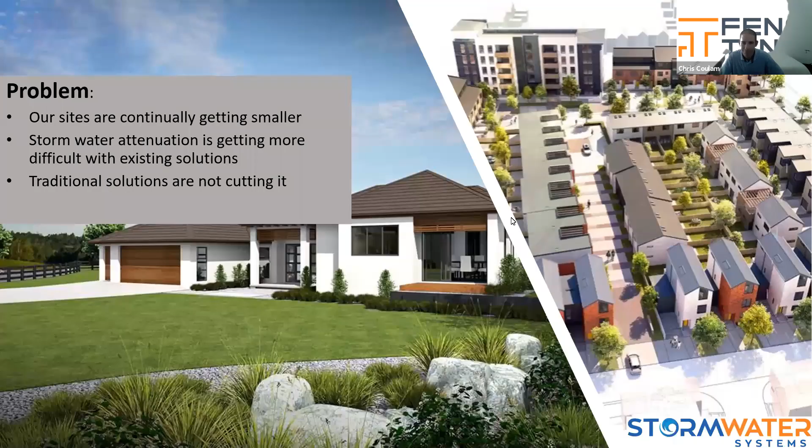So, the FenceTank. The reason that we're having to do lots of tanks is because of the increased development. So as those of you in Auckland especially will understand, we're turning green fields, which are nice and permeable, into concrete and steel and tiled roofs, which of course is not permeable. It means there's a much greater flow of rainwater off those hard surfaces. For those of you engineers out there, this is obviously nothing you don't know about.

What has happened, of course, is that we're needing to eliminate as much as we can the bad effect. So that's where stormwater engineers come in, and what we have to do is basically attenuate the flow. So we need to return the runoff to what it was pre-development. So that's where the civil engineers will calculate the stormwater requirement and what size of tank or level of storage is required.

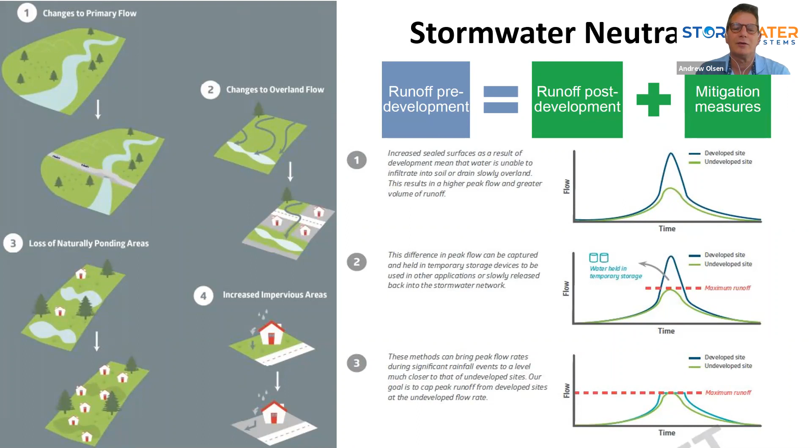We can also do that for those of you that are just looking for a quick calculation. We have access and are working with a number of civil engineering companies now to be able to provide that at competitive prices for those of you building companies out there.

So again, we can do a SMAF calculation for you if required. But in these areas, you've got the extra requirement of having both reuse as well as detention. And in Council's wisdom, they created two flow calculations, flow 1 and flow 2, quite a small difference between the two of them. But bottom line is that at least 5 millimeters of the volume that comes off the site has to be used on site.

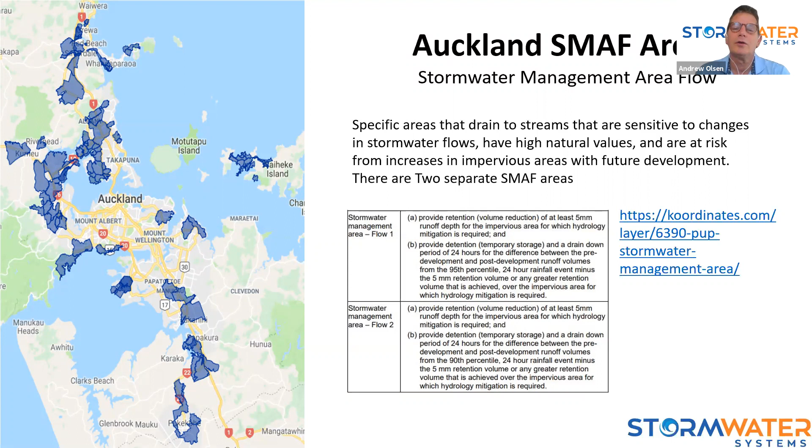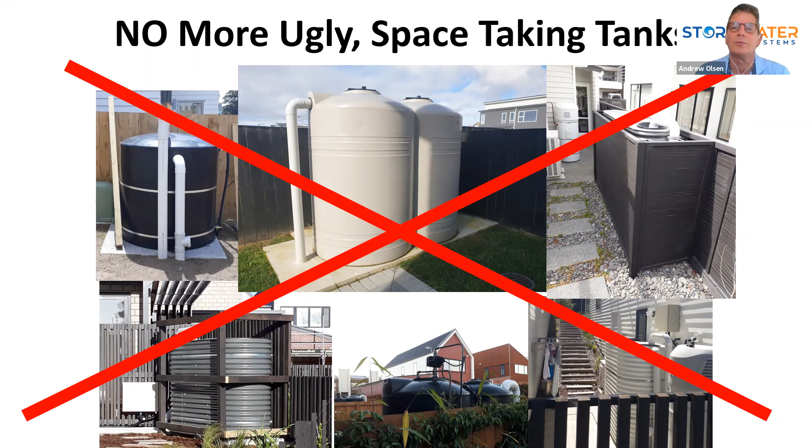So up until now, the options have been highly attractive. A lot of these were photos taken out Hobsonville and Scott Point, where, as you can see there, big lumps of concrete and all very attractive issues. And if they're not fenced, you also then have the cost of a fence as well. So with our fence tank, what you won't get is a tank that sticks above your fence and then the pipework and the like above that.

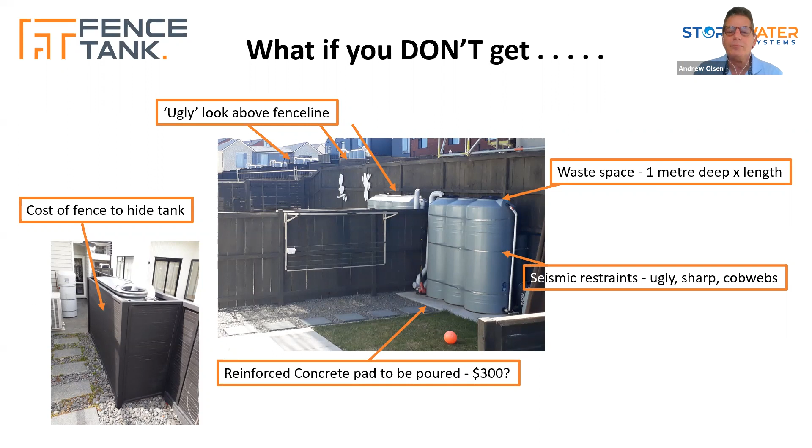You won't get the waste space, or as much waste space that takes at the back of the property. You got these seismic restraints, which have a habit of cutting little fingers and collecting cobwebs and the like. You won't have to pay for a reinforced concrete pad as well, and you won't have to then pay for the cost of a fence to hide your tank. What you will get, though, is the fence tank. Ta-da! So, introducing the fence tank. As you can see here, fairly slim profile and made in New Zealand.

Now, the tank itself, 1800 long by 1800 high, coincidentally the same height as your standard close board fence. Total depth of the tank's 410, but when it's put in line with the fence, it actually only protrudes 265-ish, depending on the thickness of your rails attached to the posts and then also the thickness of the palings. So anywhere between sort of 250 and 275 proud of the fence. What that means, of course, is that you can quite easily run it down these narrow 1 metre setbacks on the smaller sites and still have room to get past it. The other thing to note here, of course, is the 20-year warranty.

The joys of working from home is you get the doorbells with the deliveries in the background as well.

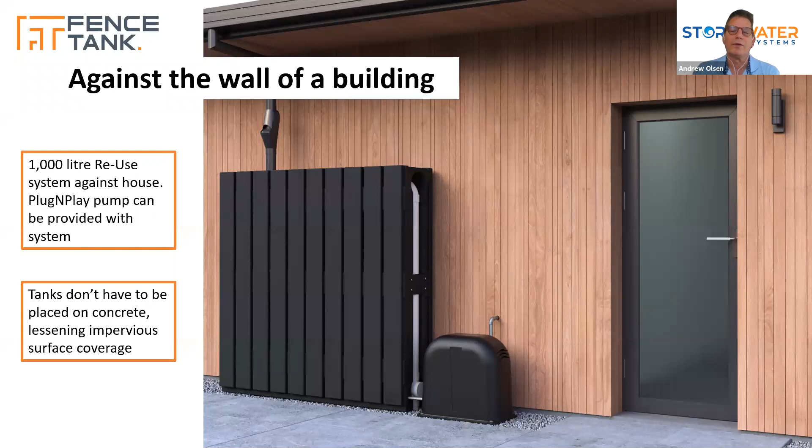The product doesn't have to just be used as a fence, though, although that was the original idea, and you'll see plenty of examples of that coming up. Just a note, these are all 3D images. None of these are photographs. The product is still in the process of being manufactured. So Dreambox have done an amazing job. A group of young guys in Wellington who are very, very talented.

So here you see a 1,000-litre tank. Obviously, each unit is 1,000 litres. And this one you see connected to one of our pumps, the plug-and-play pump, and connected up under the eaves of a house. So you'll note there the guttering or the downpipe coming straight into the top of the tank with a gutter guard. We always recommend putting a leaf diverter on every tank inlet. And this is the overflow pipe here, and the pump connected in at the bottom of the tank there. The other thing to note here is the tank doesn't have to be placed on concrete, so that also helps with lessening your impervious surface coverage.

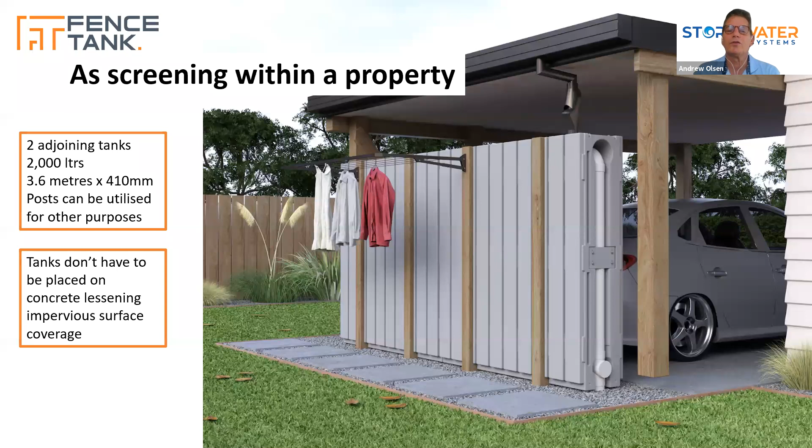Here's another example of it used on site, not actually in the fence line, but as a fence within the property. So here it is partitioning off the back of a carport, for example, and with the clothesline attached to the posts at the rear. Again, note the pervious surface that it can be placed on.

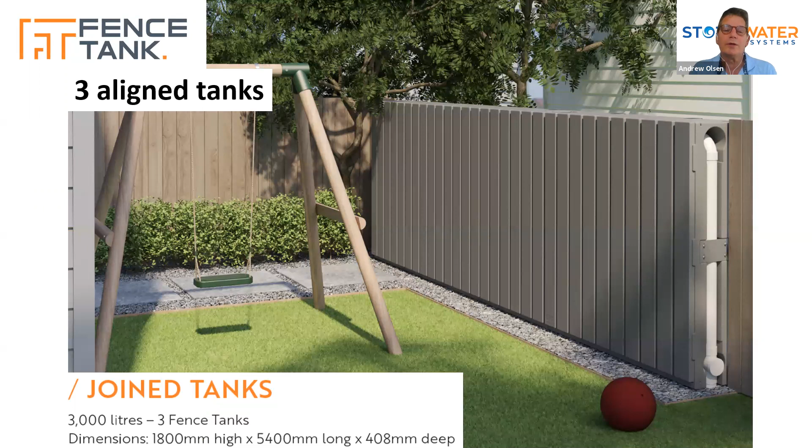Now, the real benefit here is for sites like Hobsonville Point. This is where we thought of originally. 3 in a row joined together seamlessly like this, 3,000 litres. So we don't have different sized tanks as such. We don't have a 1, a 2, a 3, a 5, whatever. You just join as many together as you need to achieve the volume that is required. So modular, scalable, flexible, yeah. So here we go, 3 in a row at the back of this property. Again, note the fact that they don't have to be on a concrete pad.

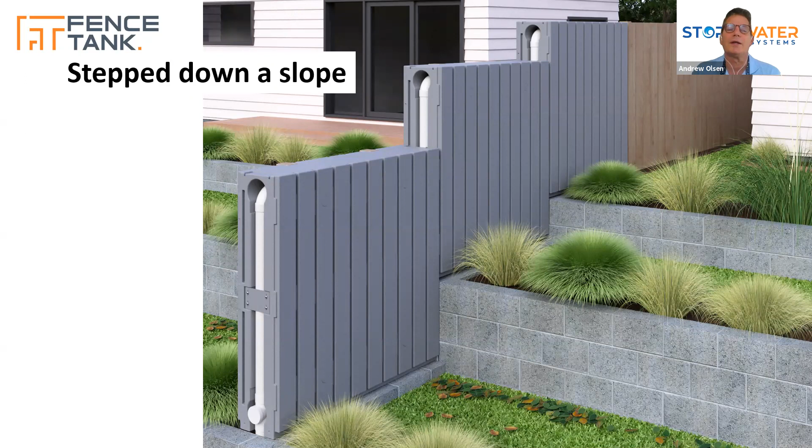And even able to be stepped down a slope on sloping land. So obviously you don't run them with the contour, because all the water ends up at one end and probably ends up in your tank sliding down the slope, but you can step them. And so as long as they're on good ground, definition of good ground, and level, you can join them together down a slope. So these ones we've shown with different levels of height difference here, and down a sloping property on top of the retaining walls.

Anyway, it's not an ad for them.

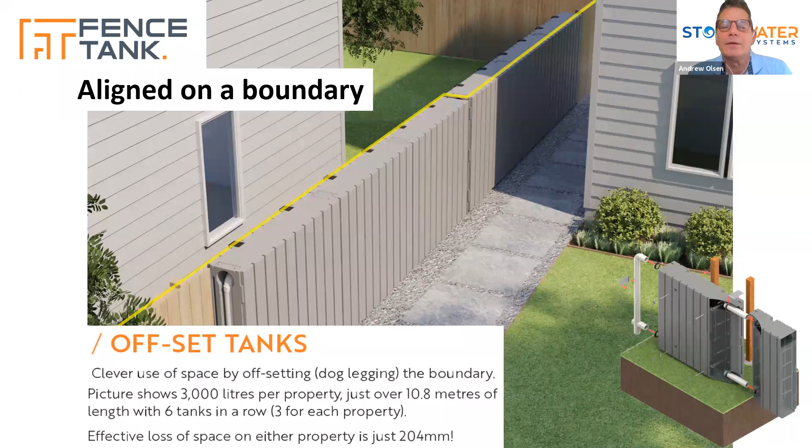Now, this is where it really gets clever and exciting. And this is what we were talking with Universal about right at the very beginning: the ability, if you're working with developers or looking at the cutting up of land, if you offset every second boundary with a dog leg, like this in the middle here, in effect you can run the tanks in a straight line and solve your easement issues by having a dog leg. That way, in effect, you only lose a couple of 100 mil on each side of usable space. So where you've got narrow sites, you've got the ability to make the most of that land space.

We did some rough calculations with the boys at Unis, and if we had worked with them from the outset, they reckoned that they may have been able to achieve up to 10 extra sites by using this methodology. Granted, I think the plan is 2,000 sites in that particular development over the course of a number of years, but 10 or 11 extra sites, that's money in your back pocket.

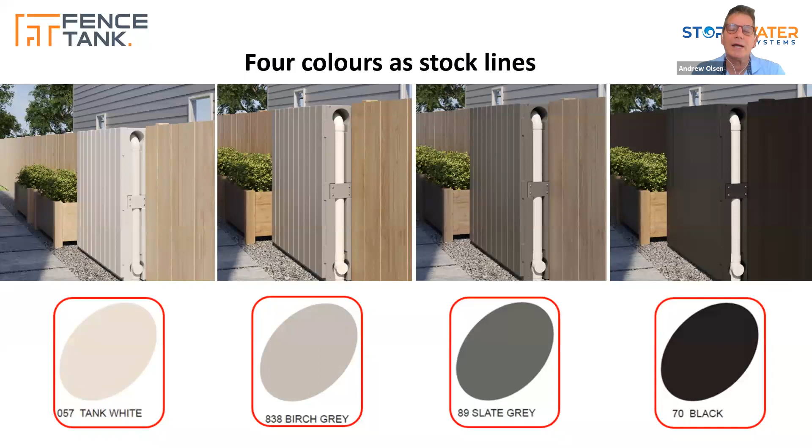Now, colouring. Talking to a number of architects to get some feedback on what the most popular colours were, we've landed with tank white, birch grey, slate grey and black. So basically white, light, dark grey and black. We do recommend you don't do a full fence of the black, especially if you're looking for potable water, because you'd be having hot water coming out on a regular basis.

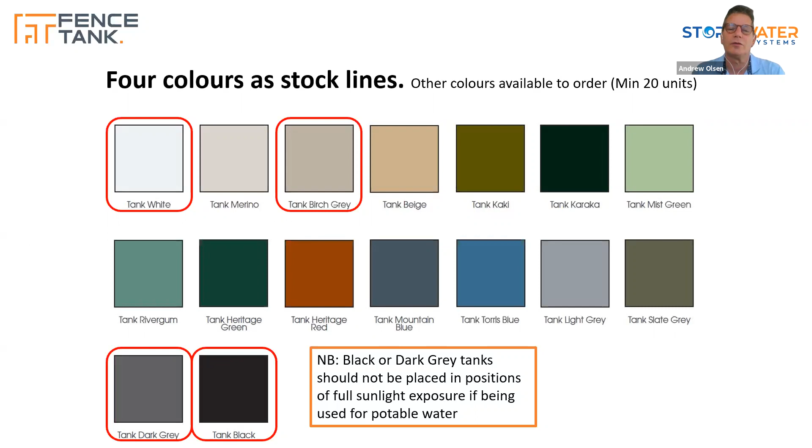But as you can see here, working with Matrix, we have quite a wide range of tank colours available. And while we're carrying these 4 in stock, we can make to order. So if you're planning from the outset as part of a development, as long as we have a minimum of 20 in the order, we can make any of these tank colours for the same price as what we'll tell you later.

And if you're wanting to get totally creative, in fact, we were talking to Jasmax about a school job, and they were looking at potentially multiple coloured tanks. So if you wanted to get carried away for a childcare centre or the like, we could do runs of different coloured tanks. These, of course, do cost more because the polymers cost more for these other colours.

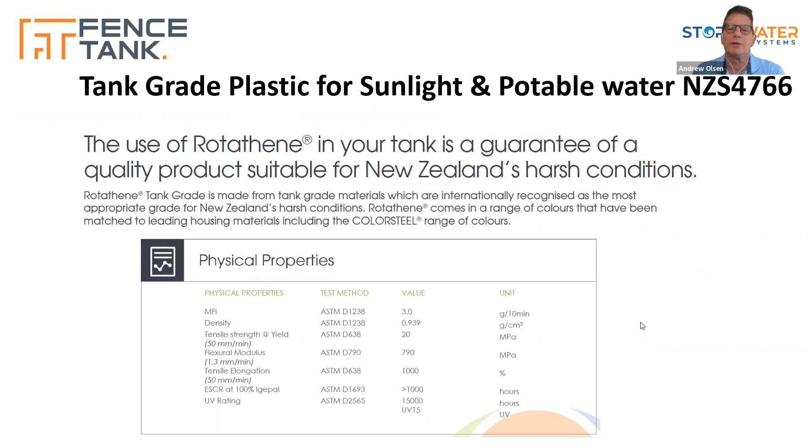Now, just to clarify, it is all tank grade plastic, the same plastic as is used by all tank manufacturers in New Zealand. There is a standard for it, NZS 4766, and within that there are all of these other methodologies and values that have to be met. So obviously we are creating a product that meets all of those standards.

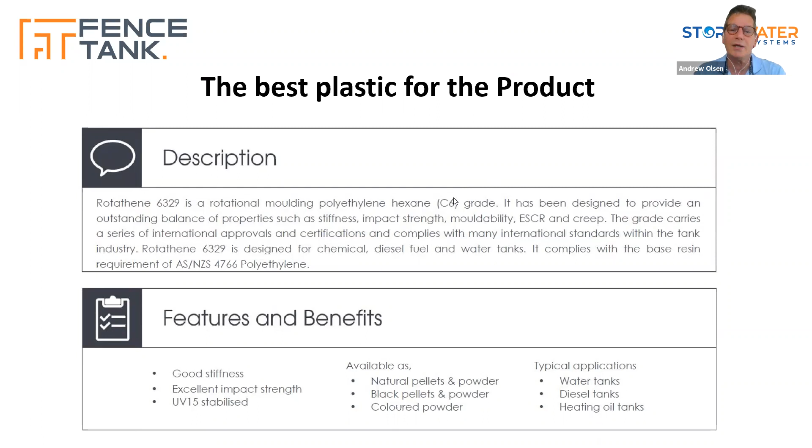Features and benefits: these products are designed with a UV rating of 15,000 hours minimum. 4766 only requires 8,000 hours, so already we're nearly twice the standard. And as you would have seen earlier, it comes with a 20-year guarantee anyway.

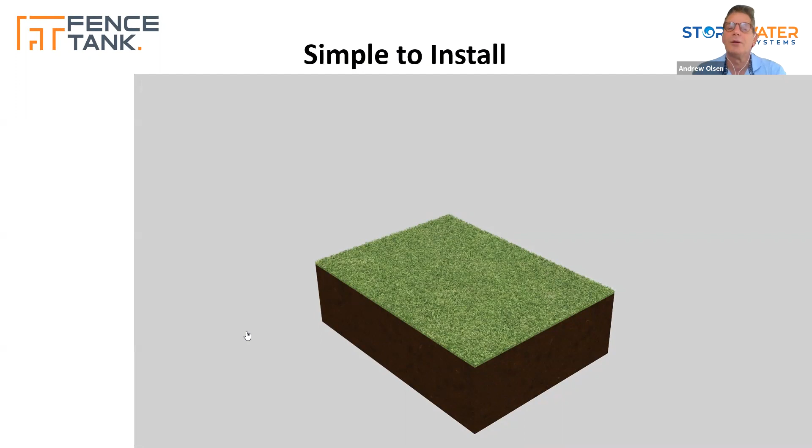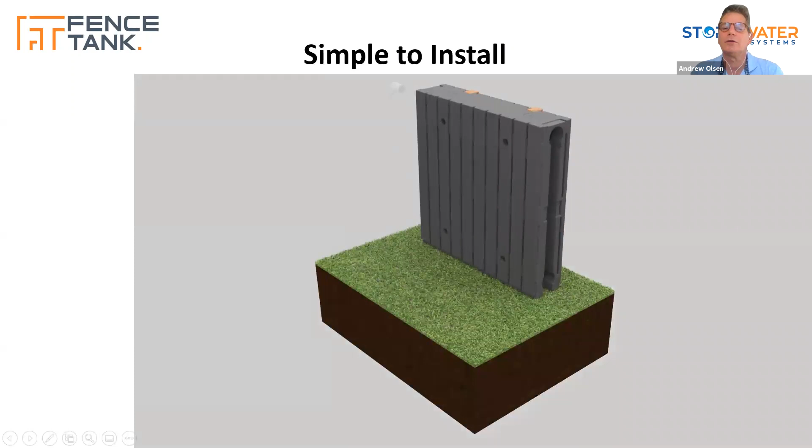Now this next animation should work. Not sure how far it comes in, but basically the posts are 900 apart. Here we go. Whoops, yeah, we lose part of it. So the posts are 900 apart, and the holes 400 round and 600 deep. That shows how quite simple it is to install. Should be able to be installed by any handyman or woman.

And then if we're joining multiples together, we do a similar sort of thing with the first one, and then we have a joining kit, which are pre-cut lengths of pipe with seals, and each tank is then just slotted together, and a joining plate and alignment bracket on the top to hold them in one place. More detail around that, as you can see here, this is how it comes through here.

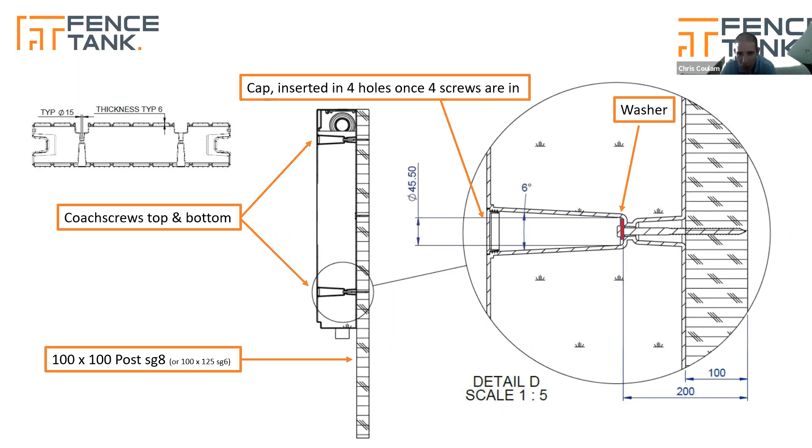Now, Chris, you had some wording for describing how this was done. Yeah, so using a torque wrench will make sure that you don't over tighten it and potentially split the tank, which would be very difficult to do anyway, but using the right tools, obviously. Yep, that's good there. And obviously a washer here at the end of the bolt and the rebate. And then once the bolts are in, we have these little end caps that cover the 4 holes to keep it nice and sealed and keep spiders and the like out.

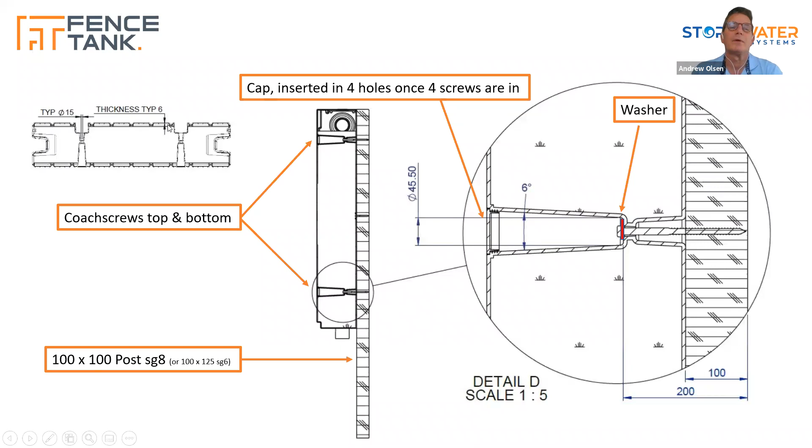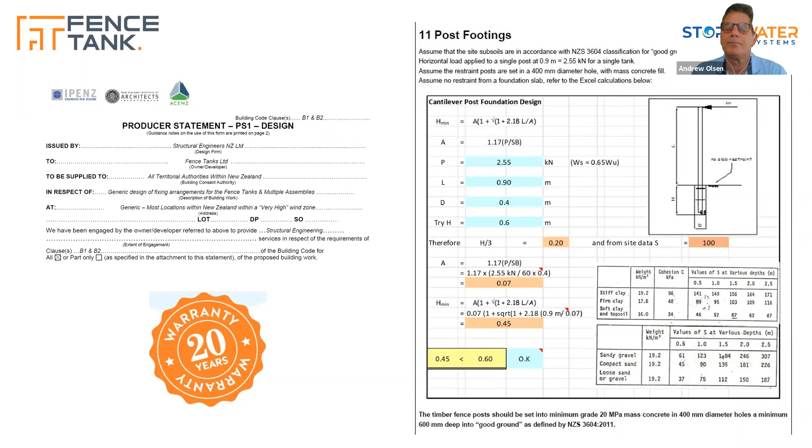You'll note here, thickness a minimum of 6 mil in the plastic. Obviously with these ribs and the like, we're going to be looking at quite a lot thicker, and rotomolding being the process it is, means that often plastic builds up in the corners for extra strength anyway. Already have a producer statement ready to go for installation and mounting and the like.

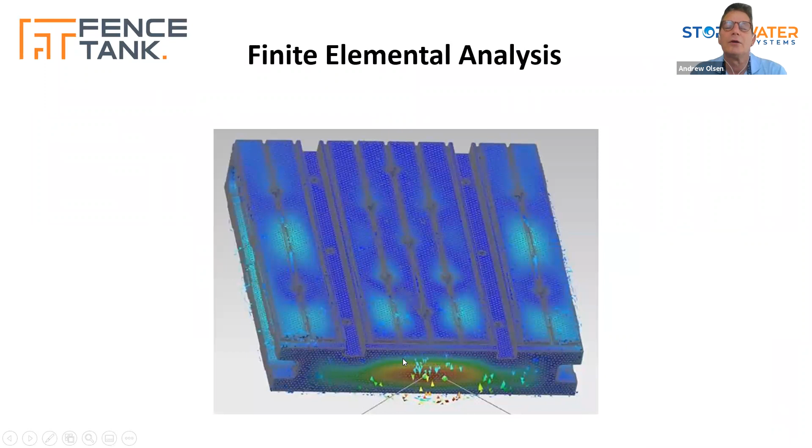And then we have had the FEA testing done, which shows maximum 6 mil flex in the tank when full and in heat. Just to note the extra color at the bottom there, this is obviously the base of the tank, so that sits on the ground, so there's no deflection. Now, we talked about detention. Obviously, these can be used for either detention or retention.

What we've done here with the detention orifice is hidden it away in the base 100 mil pipe. So this is with a reducer bush. Obviously, there's multiple types of reducer bushes on the market, but you can get 100 to 80 to 65, 40, 32, and then the appropriate sized end cap. If you need a dimension different from the standard items available, then we'd just recommend drilling out the end cap before it's glued onto the end of the reducer bush, which is obviously glued into the pipe on the end here. And if in future you need to access it to inspect it or to keep it clean, then obviously just through the inspection cap on the outside here.

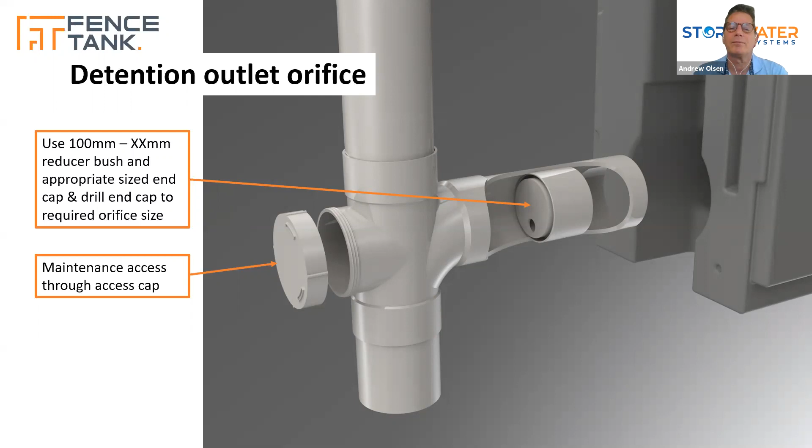So nice and simple. I think there's a slide later on about maintenance, but just to mention briefly, you can get a camera in through the hole easily enough here. And of course, there's also a breather hole in the top of the tank that you can access for having to suck it out in 20 years' time if you want to or need to. Apparently, we're supposed to inspect our tanks every year. It'd be interesting to know how many people actually do.

Now, if you need multiple orifices, so we had a couple of engineers ask about multiple orifices, then we've developed a system using a Boss junction. So at the appropriate height for the volume required, insert a Boss junction. We've based it on taking a maximum of 50 mil. We imagine most orifices that need to be secondary are usually smaller than that. So you either drill the appropriate sized hole in the pipe, or if you're wanting to keep the ability to take it out, we use an end cap on the end of it with the right size hole drilled in it.

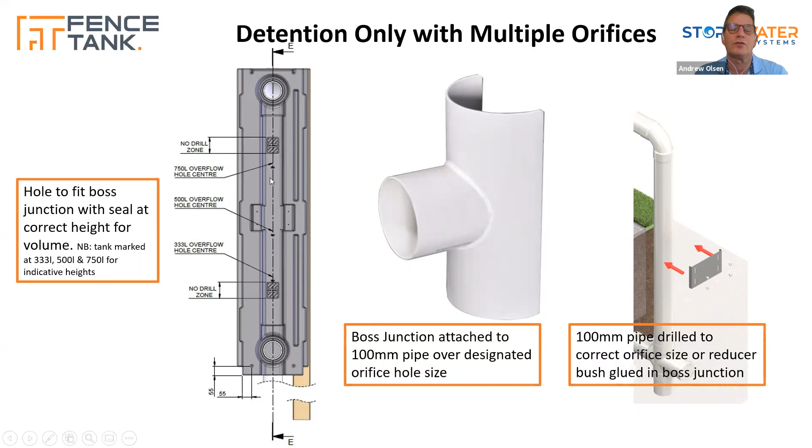And just in more detail there exactly what it is. The thing to note here is the tank already has indications on the side to try and make it easier for people. So here we've already noted 1/3, 1/2 and 3/4. We've also noted no drill zones, which are where, you would have seen on that cutaway version, the pipes join the tanks together. So steer clear of those. But in most cases that'll solve the problem. We also have a matrix available which gives you the exact distance up the tank that each of the volumes correspond to.

Now, reuse was the next question. Now, this is a chart that we just came across this morning. In fact, I think Auckland Watercare only published it today. Our water is at the lowest it's been for 25 years in Auckland right now. It doesn't look like it's going to change anytime soon. So we're looking down the barrel of the worst drought in 25 years right now.

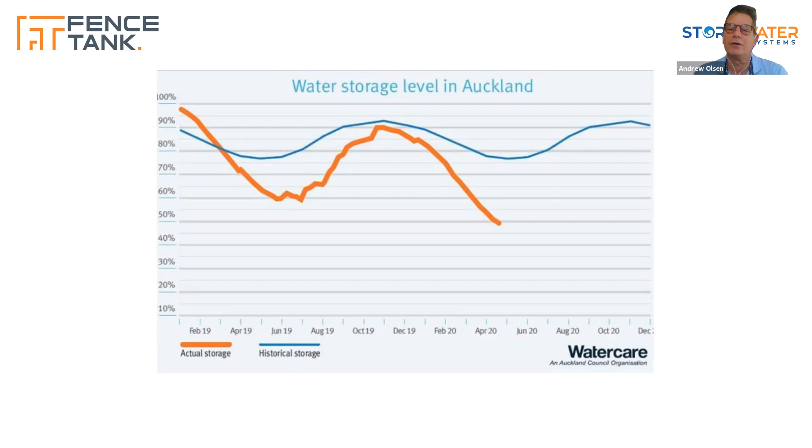If ever there was a time that every single house needed to have water storage, then this is it. Or should have had some time ago, because obviously it'd be empty by now. What we have is the ability to use these tanks for detention or reuse.

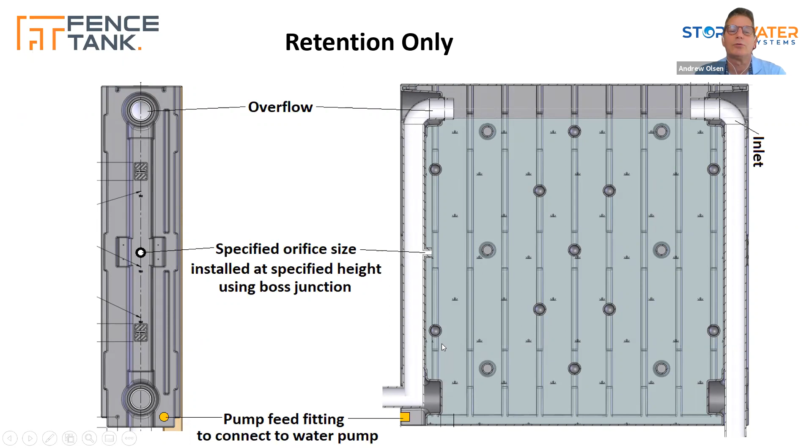So here's the setup with a combined. So obviously the inlet, the overflow, this particular orifice here is your detention orifice, and then that means the remainder of the volume is able to be used for reuse, and we use the easy tap connection for being able to take your pump feed out at any height up the tank.

So with detention, you've got a couple of different ways of doing it. You can either apportion it across the range of tanks. Now, this could be 2 tanks, this could be 102 tanks, but we would recommend the better way to do it is to fill your retention tanks first. Once they're full, overflow into your detention tanks and run that as a system with the orifice at the end.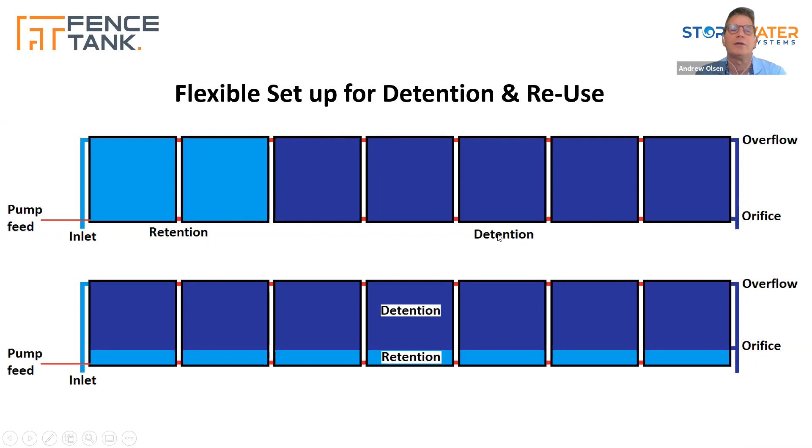If you're doing a retention system or reuse system, then Stormwater Systems has developed our own plug-and-play pump. What we found with doing the Aquacomb solutions was that there were an awful lot of, shall we just call them bespoke pump systems set up around the place with various forms and quality of pipework and connections and exposed electronics and the like. There was a photo in that very first collection of pumps which looked more like R2-D2 than it did a sensible pump setup. And so all of this is enclosed in its own box.

And for those of you in Auckland, something that's extra and unique to Auckland, of course, is the testable double check valve with gate valves to isolate it so it can be checked and supposedly tested once a year and reports supplied to Auckland Council. Yeah, right. It does already have a backflow preventer in it as well. And the unit without all of this paraphernalia is supplied to everywhere else in the country. Just Aucklanders pay $300 and something more for this. As a requirement. As a requirement, yeah.

We also have a submersible pump setup coming. We were hoping to have that for this webinar, but unfortunately not yet. But obviously, if you're interested in looking at specifying the tank, then we'll engage with you about the options for pumps to go with it if necessary.

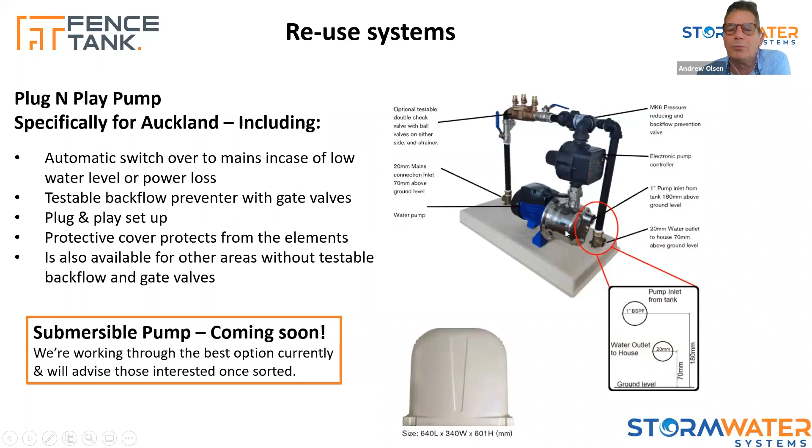Now, pricing. The tank itself, $879 for 1,000 litres. Now, there is another slimline tank on the market. There's probably several. There's a number of tanks that call themselves slim. I'm not sure that 800 and something millimeters is slim, but anyway, definitely not my waist measurement at that level, that's for sure. But the most direct comparison, 1,000 litres sells for around about $1,200 plus GST.

And then what we've done is tried to make it as efficient as possible for installation and from a cost perspective. So we work with Altus Workshops, which is the disabled workshop in South Auckland, and like to give them as much work as we can. So we're getting all the pipes pre-cut to the correct lengths, we're putting together the packs, and then they'll bag them up and have them ready to go with each unit sold. And this way, of course, we can also add some value by having lots of pieces at a lower price.

So if you go to your local wholesaler or retailer, the parts alone for these packs are quite a lot more than the combo pack that we are selling these for, to make it simpler and easy. And then you know exactly what bits you got for the tank each time. The joining kit, of course, 4 seals. Those rubber seals cost a fortune, don't they? Again, a lot cheaper if you buy it direct from us.

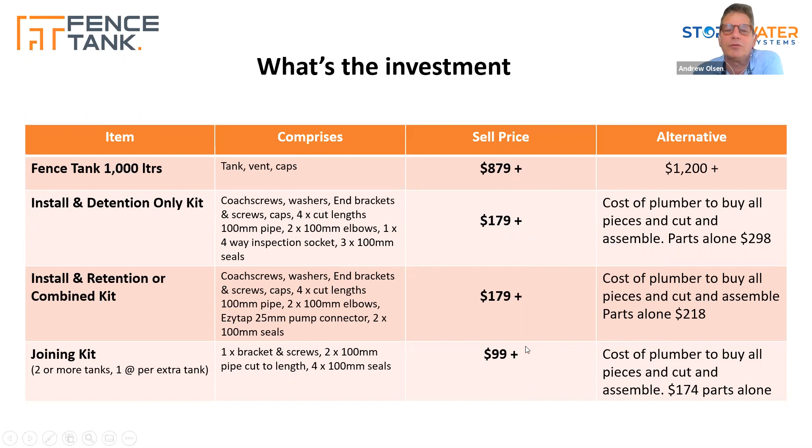Now, if I may, I've just been informed that it's a 2-month lead time for concrete. I beg your pardon? 2-month lead time. Wow. So not needing concrete underneath these, I think we've got a huge advantage. Assuming that it's July that they need them. They will be available from July. Of course. Yeah. So now there was a question yesterday about council.

Has council signed these off? My understanding is council doesn't need to sign them off because it's a water tank like every other water tank on the market. We provide the PS1, which is what is required, and that is all that's required. So they can be specified, included on building consent drawings and submitted to council. We've actually already had a number of jobs with the product specified and passed through, waiting for BC, and just waiting for the tanks, obviously, for the end of the project. So don't see any issues there.

Auckland specific, again, we have our wonderful district plan, and under the district plan, a water tank is considered a building. So for most new developments, you do a resource consent anyway, so you would include this as part of that resource consent. And some wag said, oh, well, if you're building on the boundary, it's got to be fire rated. Okay, so your wooden fence isn't fire rated. What's the story with that? And of course, this is filled with water. So yeah. Yeah, it's interesting.